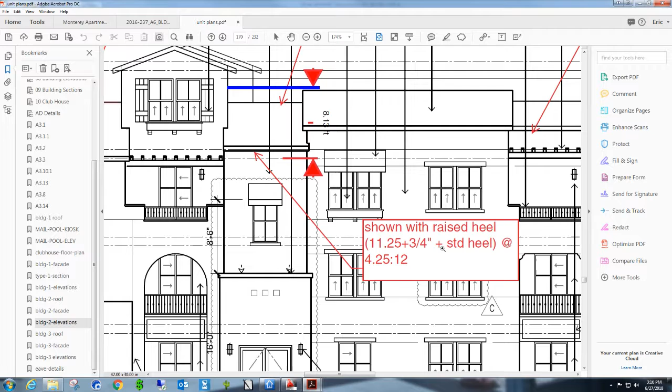And that is figured by right here. This is like the floor system that supports the unit above. So this line's going through here, which is 11 1/4 plus 3/4 inches plus standard heels, and that's how that heel height is figured.

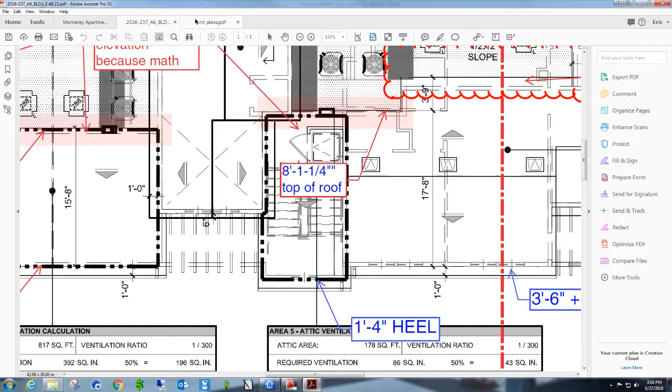When we look at the stair area, the distance from here to here is 19'1.5". That drives the mansard on the mechanical well, and when you go from 19'1 1/2 this way at 4.25 and 12 pitch plus a 1'4" heel height, you are left with 8'1 1/4" top of roof based on this run.

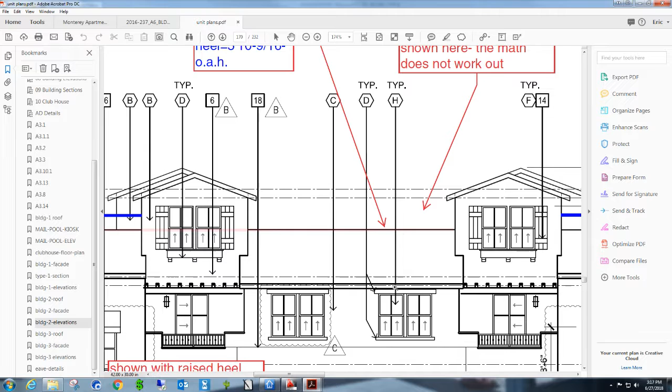And it looks like the elevations were drawn so that they wanted to make this roof line match all the way across. The only way that is possible is if all those spans were in line with each other and they all had the same heel, and if they weren't in line with each other, one was stubbed starting off of the base of the distance from this being the 4-inch heel. So this roof over the stair and this roof over the stair is not drawn accurately.

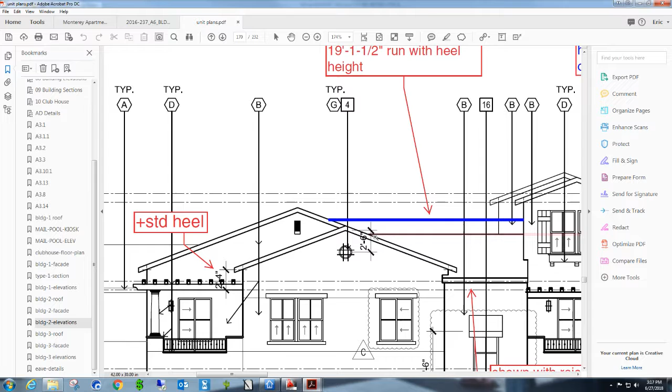With this, all the heel heights and everything figured in there, this valley line comes back here. It comes along the roof at a certain point and changes here, and that affects the roof plan. Go back to the roof plan, and it's right here. So you have it drawn with the valley line way back here meeting. It doesn't quite do that. With this matching the heel height out here, the valley line starts about here and then it cuts back. So this is all over framing to make that roof plan.

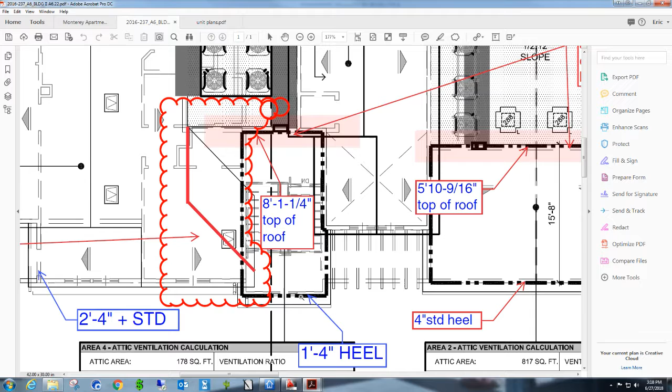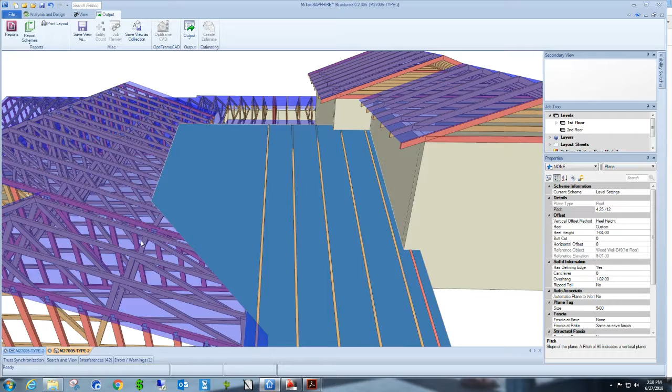I'll show you in 3D. And that's what it looks like in 3D. So there's your 1'4" heel. And there's the overframe. So let's go back to the PDFs. So the roof plan will have to change here.

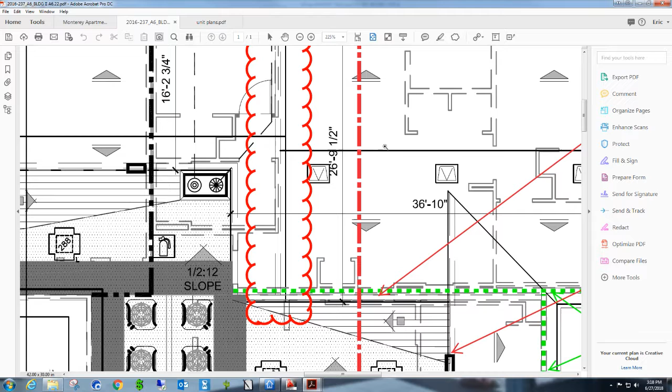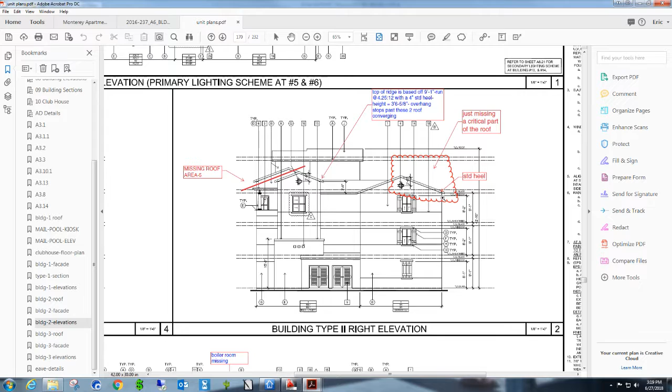I don't think you would want to have that small break in the fascia. Your best thing to do is maybe change this span here and raise the heel up to match the offset at the stub. Then the top of the roof sheeting would blend all the way across. Let's look at the rear elevation. So these two roofs would blend here. This line right here would disappear because currently you have a very tiny

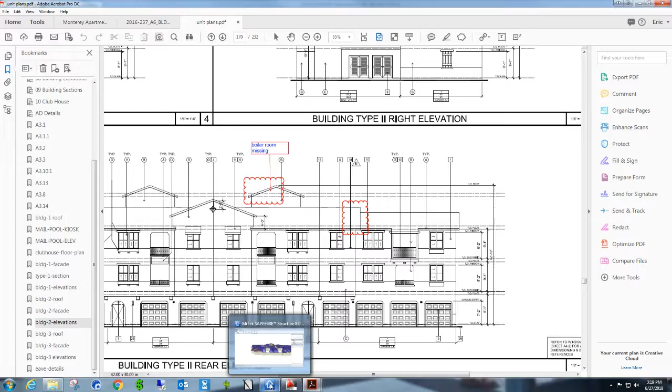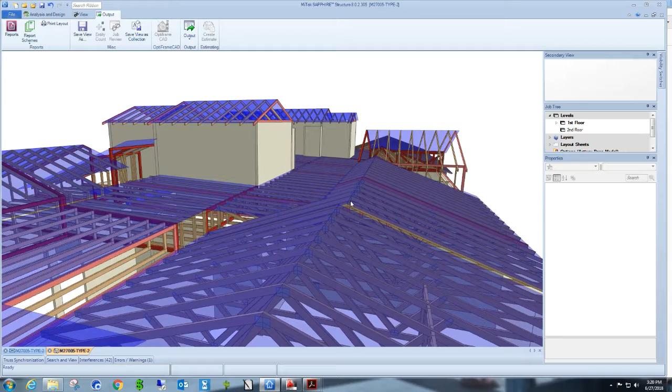fascia board that's ripped to the top of the tile roof, and we'll look at it in 3D so you can see what it looks like. So here's the offset, and there is the fascia nightmare right there, because on the back side of this ridge everything else blends.

There again we ran it. There's a little issue here. This roof is diving down, but the rest of this roof is based here to the roof plane, but there's nothing taking care of this. One option would be to change all the framing in these couple units. Maybe changing this framing direction and running monos from here to here, putting a girder across here, and then continuing this span back.

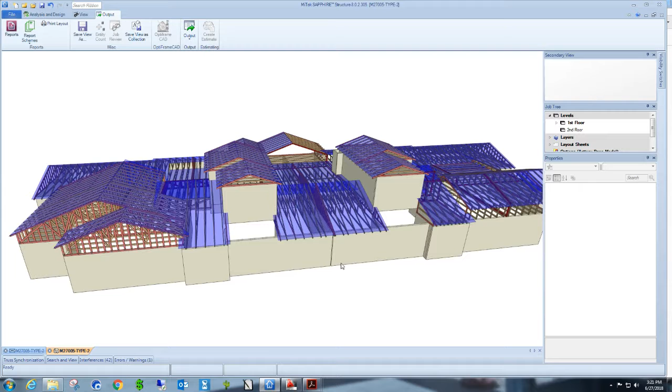And maybe instead of breaking, we could break the roof sheathing here, and then pitch this up to match this plane of the roof. But that's going to be for you guys to decide and make a revision. But I don't think you want it that way. So get back to me on that section. Let's look at the rest of the plans.

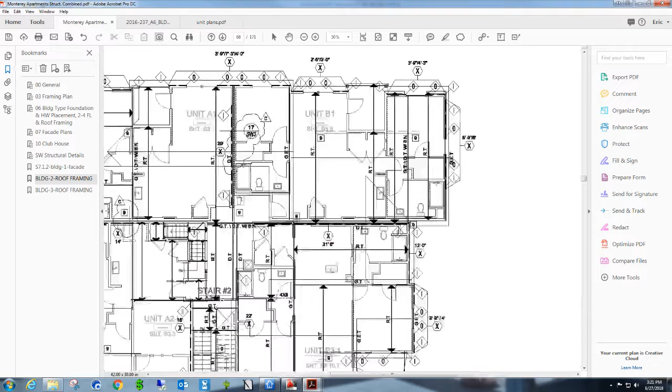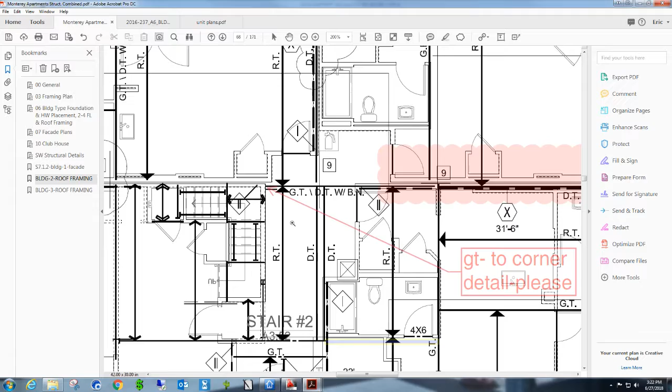On the structural page, let's see, get our bearings so we know where we're at. Okay, right here. There is a girder truss right here that is showing diving into this corner of a story above. There needs to be a connection detail for the corner of this girder truss and how it's being supported. It is a truss to structure connection, so it's the responsibility of the EOR. Same thing on the opposite end. Same thing.

I need the PSF loading for the boilers. Right now this girder truss is not shown where it should be. It should be in line with where the roof breaks, and then this shouldn't be called a girder truss because it's not girdering anything.

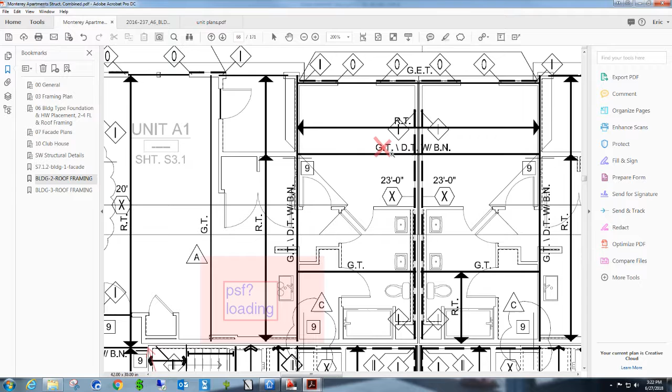I also want to make sure that this unit, this is the way we're doing it. It's showing one continuous span sitting on two party walls. There's not a detail for this. There is a party wall detail, and it shows like a truss down the center with a mono and a mono hangering into it with verticals at every truss.

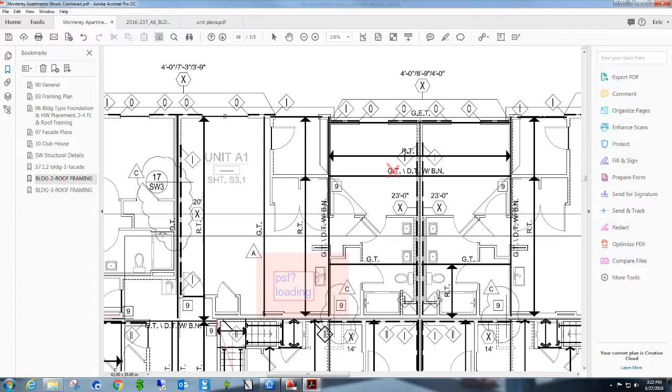This isn't called out that way. It's just called out as one, which is a cleaner way to do it. I can supply blocks for both sides of this shear. So just let me clarify this.

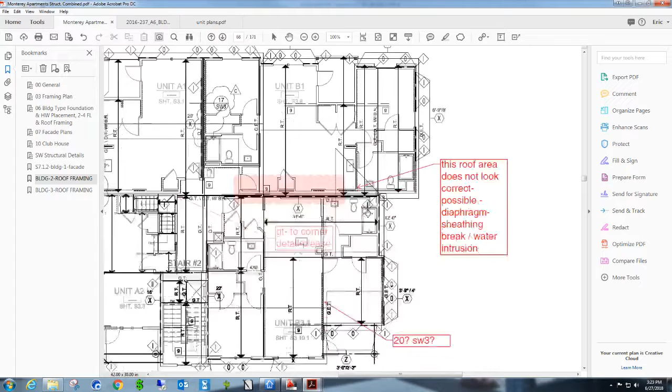Same thing with this one. This is not a girder truss. It's just a drag truss. It's not supporting, it's not girdering anything. Same thing on the opposite side. It's not a girder truss. I'm figuring for anything that goes high to low roof, span changes, are we using the 20 SW3 detail, typical.

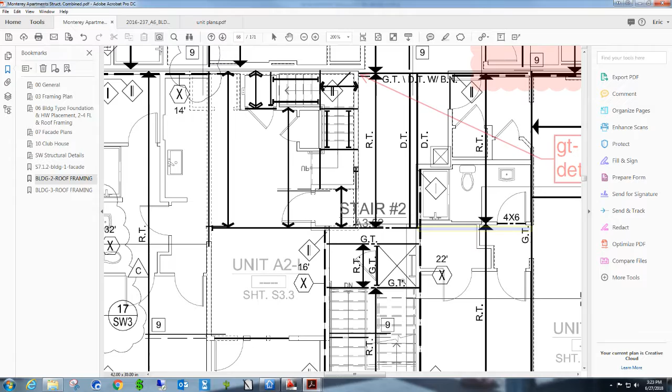Right here at the attic access. So this is a roof access that's inside the trusses, not outside the trusses. So there probably needs to be a detail for how this is going to be done. You're probably going to need a self-closing door here, and then another self-closing door on the outside, because this is part of the roof. We'll take a look at the roof plan so you can see it.

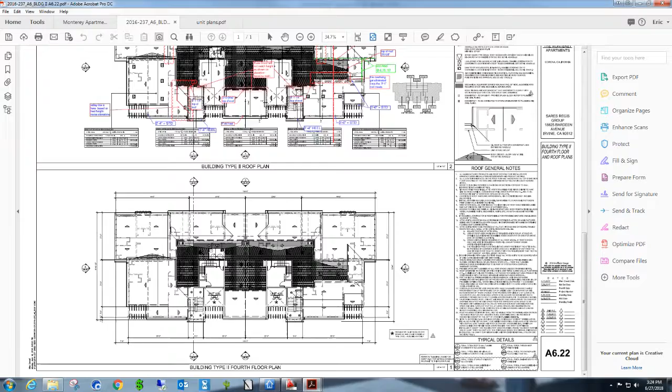So here's the pitched roof area. The mansard mechanical roof starts beyond, so there needs to be a self-closing door in here. Structurals right here. So what I was saying is, this is where this mono pitched roof is going here and dying. There probably needs to be a detail for how this roof is being framed on top of this truss.

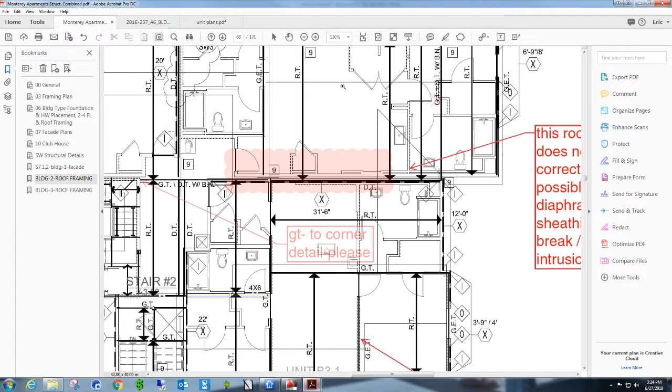There's going to be a stud wall framed on top of the trusses, and this is showing continuing down, but there's only 4 inches of heel here, and this is up much higher like I had shown in the 3D. Right here, so there's like a hole in the roof right there.

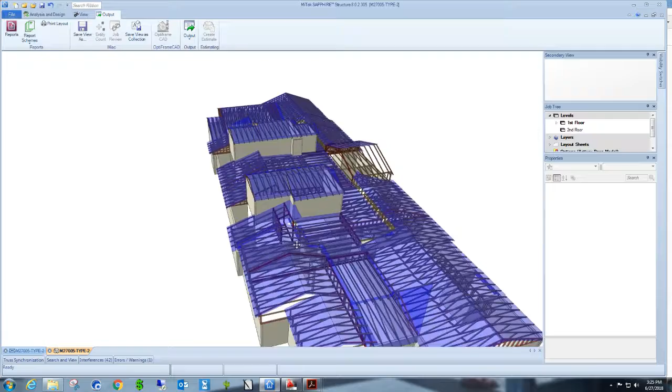And this is what I was talking about, having the access door, and then there'll have to be a hole in the girder truss, and then a wall will have to be framed out on top of the roof to box out a self-closing door that accesses outside, unless for some reason you guys move the attic access and put it in a mechanical area. It looks like it was pretty tight with how many mechanical units were up there.

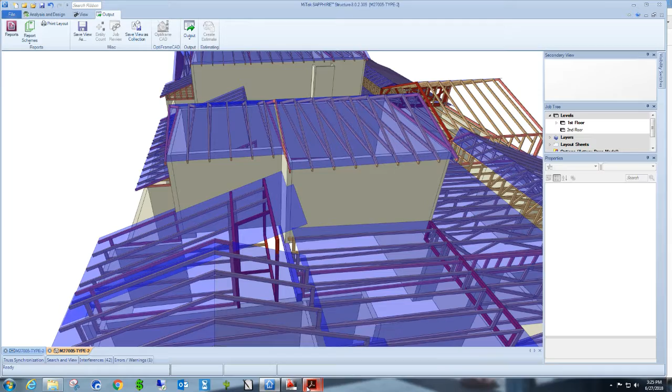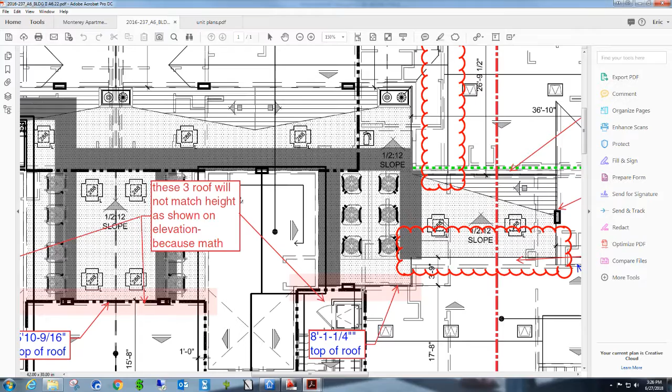Let's look at that roof plan. Yeah, so if you were to put the hatch somewhere in here, you definitely have to move all these units and move stuff around. But yes, this access is within a mono-pitched roof and not in the mechanical area.

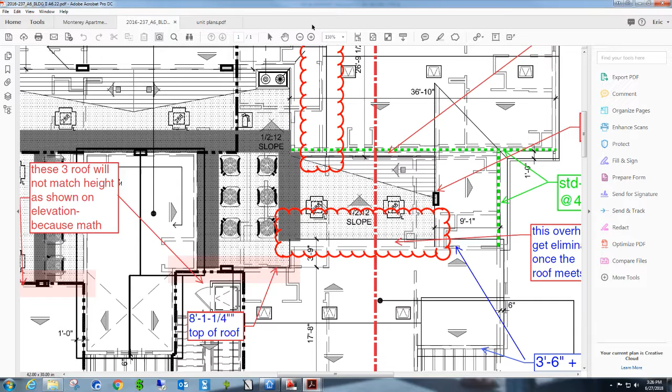Right here, it's also being shown with an overhang. You only see the overhang from right here until it meets this pitched roof from 9'1". Let's take a look at the elevation so you can see it. Right here. So this is 9'1" running back at the pitch, and this is the overhang.

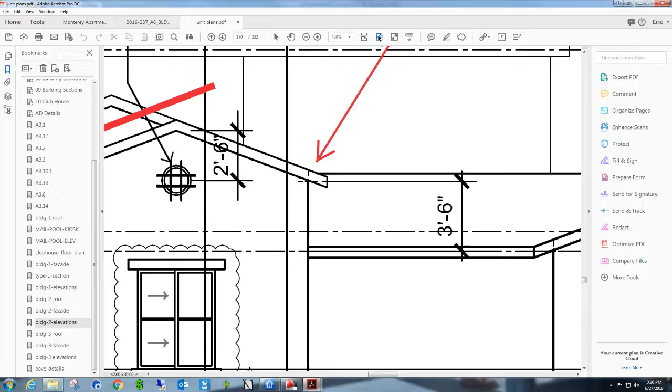Once these two roofs converge, you will not see an overhang. If you want an overhang there, I could put one, but it doesn't make sense why there would be one. You're not seeing it. And this is what I'm talking about, right there. Because right past this pitch, this top of roof hides all this and beyond.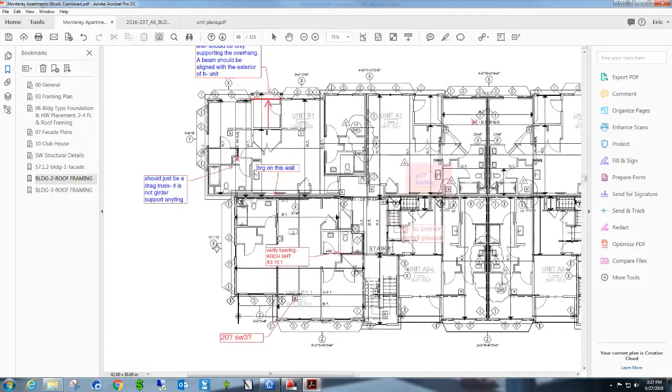I think that's it for right now. Just need to get those things. Oh yeah, right down here. So typically on all these B units, on the 3 type, you're actually showing it correct. On the 2 type, you're showing the span going out to this below plate line beam, which would turn it into a tail bearing truss, and you already got a ceiling here that is flat.

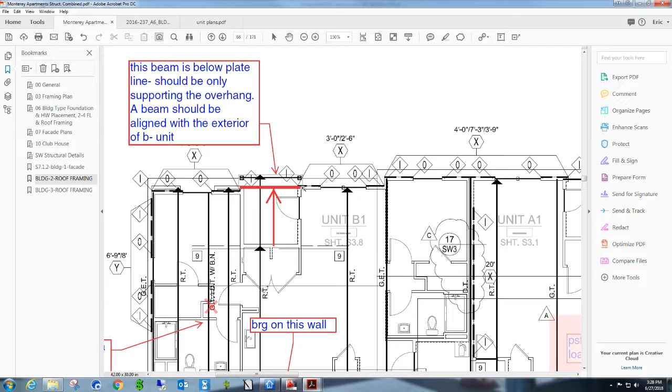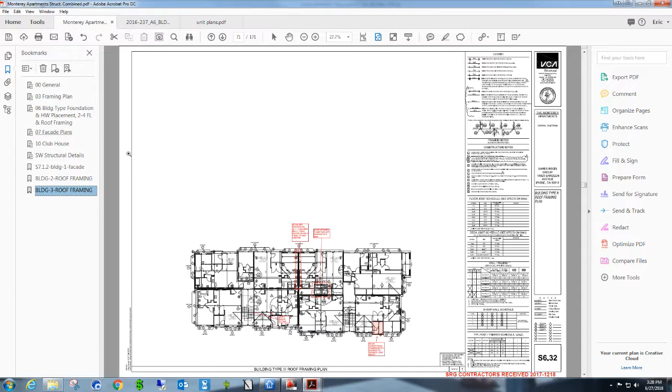So is there any way that we could make this same as the 2 plan, or the 3 type, and put this header here, and then this is just an extended overhang that goes down to a lower plate line? And that should be it.